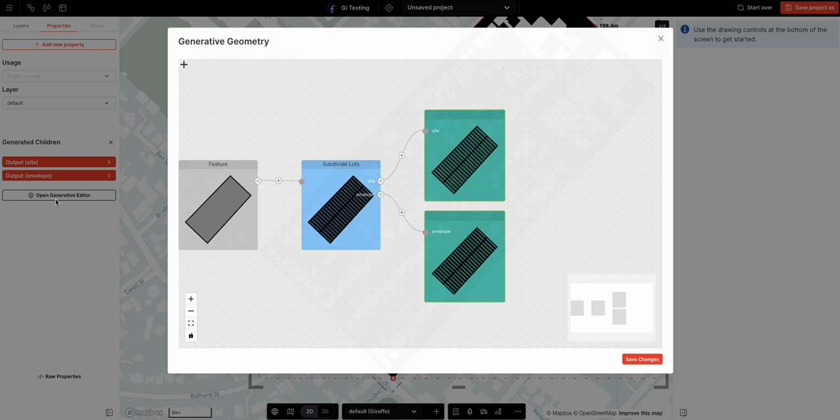Let's start transforming. The first thing I'm going to do is use the subdivide lot. I'm going to open the flow builder. And this shows you how the flow builder works.

You've got the input feature, which is the rectangle. Then this blue square represents an algorithm, which is a subdivide algorithm, and the two greens represent the outputs, which is a site output and an envelope output.

And so I can assign a usage to the output. So I'm going to go feature planting, and I'm going to say the envelope is a residential envelope with let's say three levels.

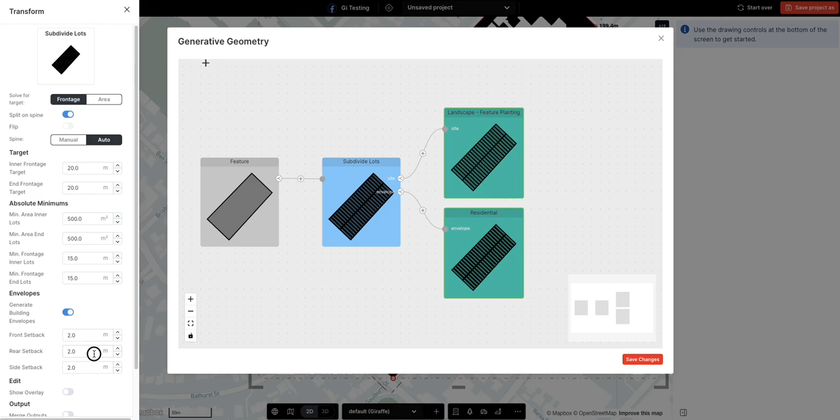And then I can click on the algorithm and edit the parameters. So we said the rear parcels were about 20 meters. So if I do that, then you can see, and this is what's amazing, as you edit these parameters on the left, you actually see the impact of those edits in each of these preview windows.

And so if I save changes, you can see there is a subdivision. I mean, that's not natural because I've drawn a very big rectangle. So what we want to do is we want to subdivide this subdivision.

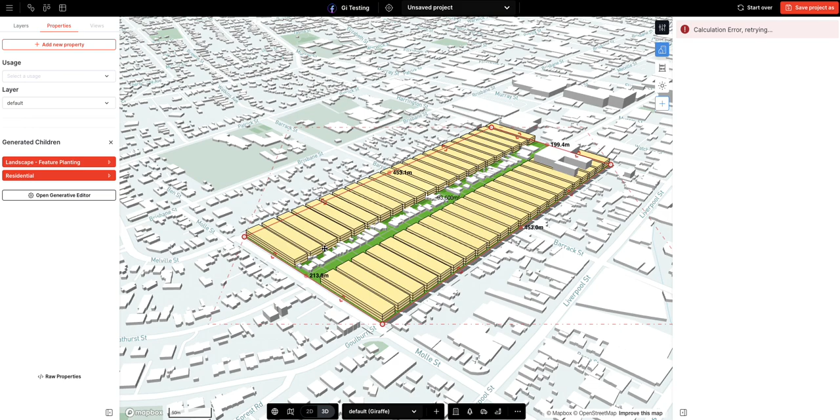So I'm going to delete this site because we don't need it. We're going to be operating with two subdivisions, so I'll put in another one. And when I click that plus button, we get the identity transform. So it takes stuff and just gives the stuff out, you know, f of x equals x.

And I'm going to apply subdivision again. Okay, so it's subdivide to subdivide. Now there's an issue here where the super lots are not 20 meters. They're closer to 180 meters.

So you can see now it's dividing into three. Maybe it's 200 meters. Let's leave it at this for now, and we'll come back and fiddle with it later.

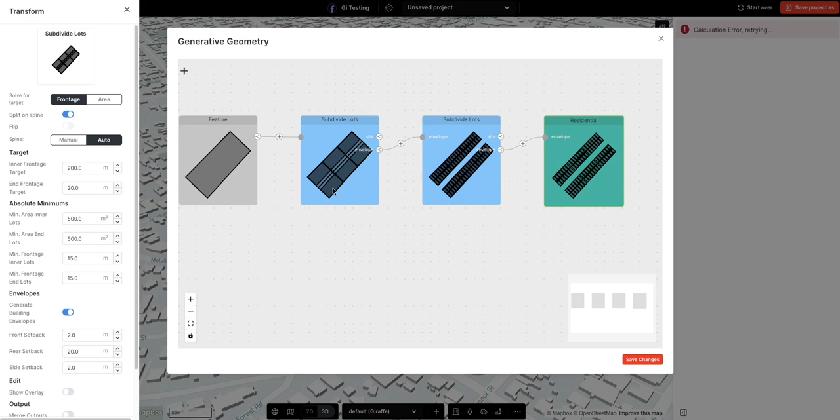I'll show you how. And what we're going to do is we're going to pretend the envelopes. We're going to set the envelopes, rather than being residential buildings like they are currently, we're going to set them as sites. And the setbacks are going to be the separation between those sites. And I'm going to set those setbacks, the side and the rear setbacks, to 10 meters.

You can see that there. And that 10 meters, because there's a 10 meter setback on each side of the boundary, sums up to a total of a 20 meter separation. And 20 meters is a good width for a road. You know, 4 cars, 2 pavements, 20 meters, it's a good amount.

So I've changed the parameters of this subdivide lots. And then I'm just going to change the parameters of this subdivide lot, which, because we just added it, is coming with the defaults. And I said the rear setback was about 20 meters, and let's set the front to 3.

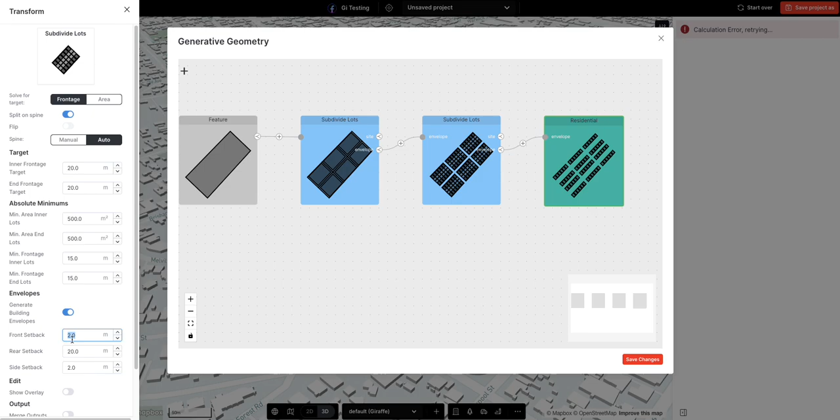Save those changes. Okay, cool. I think that's pretty cool. That's looking closer. Now I'll show you something here.

Is in this view, if you don't want to get into the generative editor or the flow builder, you can see the flow here. So if I click on this, you can backtrace, and if I click on this residential, you can see where this is coming from, in terms of the algorithms that the base rectangle is passing through to be converted into these things over here.

So the last one's this residential one. And this first one is the overall one. So I'm trying to get this a bit bigger. So maybe if we say target is 220, there we go.

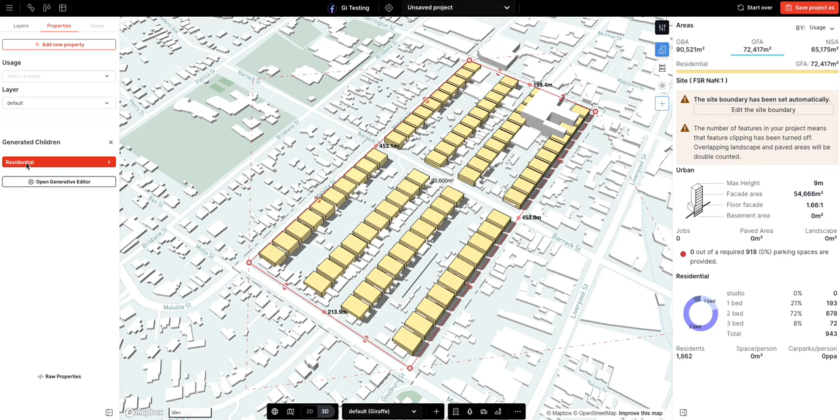Now we're actually getting dividing into 2 roads, which is what we wanted. But this, and if we click on this again and we look at here, the residential one, the inner frontage is about 20 meters. And if we pull this back, you can see these parcels are not 20 meters. These parcels are closer to sort of 10, right?

So let's set the target to 15 rather than 20. Actually, why not go to 12? It looks very narrow now, that's probably too narrow. So let's go to 14, and I'll stop faffing.

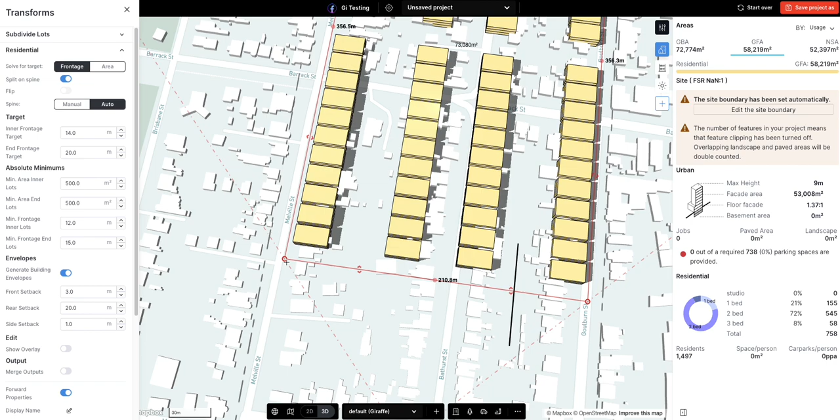The side setbacks appear to be a little smaller than 2 meters, more like almost 1 meter, could be a bit less. The front setback is hard to ascertain, because this block between Melville and Bathurst is actually bigger than Bathurst and Goulburn, which our hacked subdivision of a subdivision is not going to be able to accommodate.

Actually, you know what? I'm going to see if it's able to accommodate it. It is, it is, I take that back. John and Chen have built the most fully featured beast that it's possible to imagine. Incredible.

So that front setback, I think, is a bit more. Okay, there is something going on here which we won't be able to meet, which is that the setbacks on Bathurst look like they're a little smaller than Goulburn.

And you can see here there's a nice output for a town planner, seeing a constant rear setback have a different impact on the built envelope. Because these sites are longer and the rear setback is not a function of a percentage or a dynamic amount, it's a constant 20 meters, these are much smaller. So the solution would be to change them dynamically, or to equalize these roads a bit more.

Groovy, all right, 250, there we go. Okay, built form. Now I'm almost happy with this, but I want to get a bit more on the site stuff. So what I'm going to do is export these sites, and set their usage to something nice and green.

Deep planting, save changes. Excellent, we get that nice green. I'm just going to turn off the other buildings, and I'm going to do one more thing: offset the super lot with some nice rounded corners, so we get to visualize that road reserve a bit better.

So I'm going to come back to here, and get this envelope, which, remember, in the first subdivision algorithm, represents the super block. We then subdivide the envelope into blocks or parcels. And so there you go.

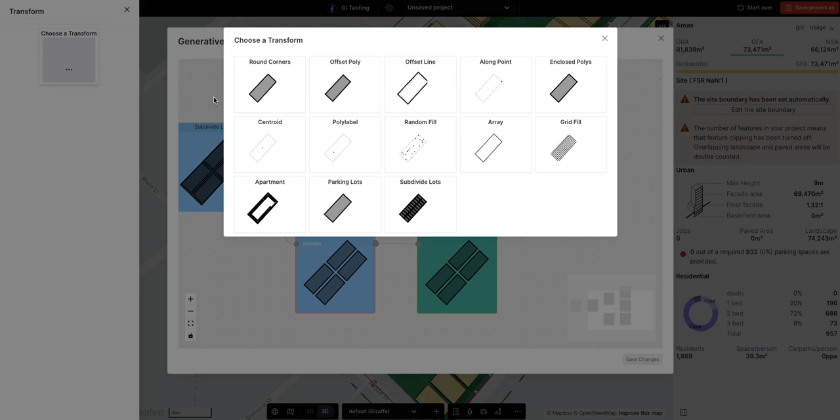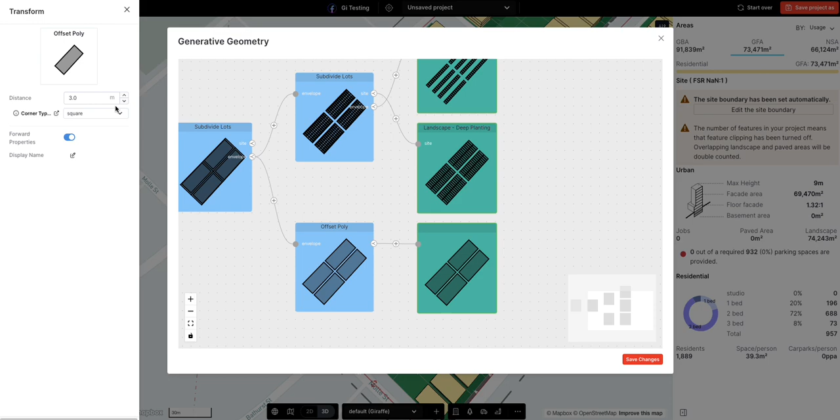I just click that, then I click plus, and I'm going to choose the transform that's going to be round corner. No, sorry, wrong one. I'm going to choose offset polygon, and offset it by 3 meters, with round corners.

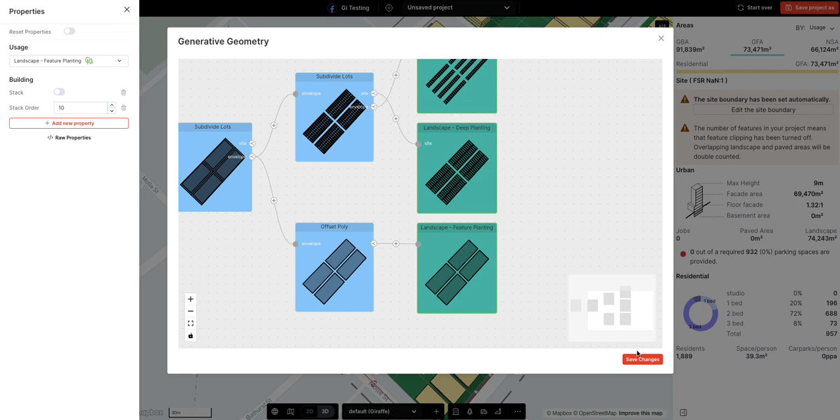And now I'll give it a usage in its green output box, and set the usage to feature planting, and save changes. Okay, excellent, now something's happening here. As you can see, the feature planting is higher than the deep planting. So if I open this and come to the planting, you can see the height there is 1.1, so I'll save those.

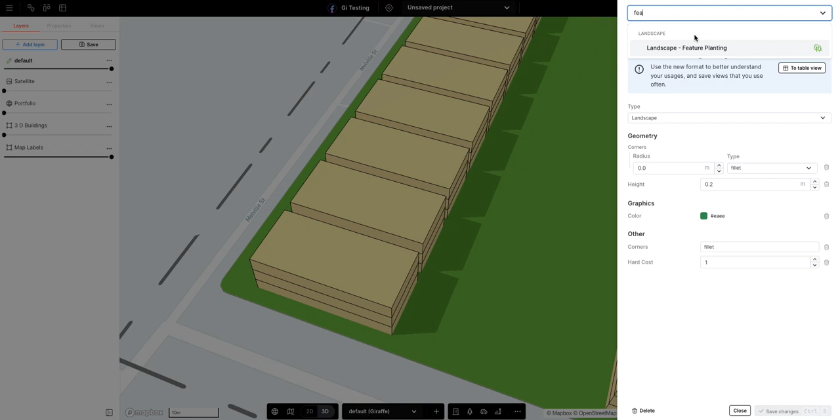Then I'm going to go to, hang on, deep. Now I want this to be 0.2. Save. And then in feature planting, I want you to be 0.1. Save. There we go, so now the deep is above the feature.

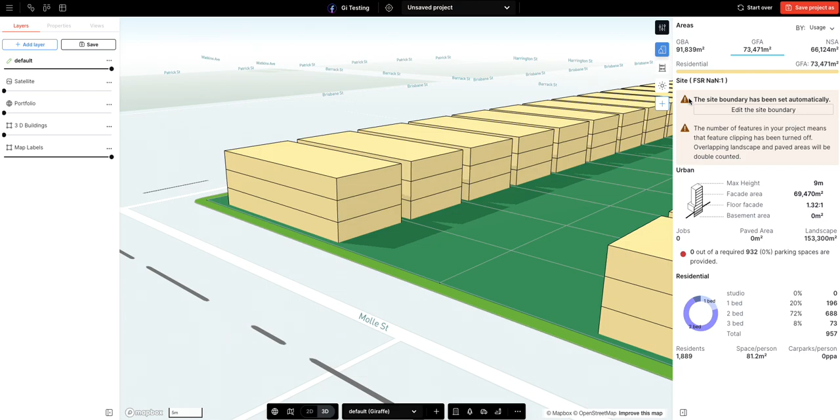So it's taller. So I've used the usage editor to change the usages which are being output, so you can see how all of the bits of Giraffe kind of fit together in a most delightful way. All right, bang, okay, I think that is pretty cool.

So a subdivision of a subdivision. We're using some manual overrides. You can see that Giraffe doesn't really care about rectangles. The algorithms are powerful enough to deal with kind of squiff rectangles, but not all urban shapes.

But let's say we're planning a new subdivision, you can see the algorithm kind of shears and stretches things, and there's a way you can get around that by adding a poly, like another point, which kind of straightens up everything except for the last bit.

And I think that's it. That's a really good representation of the built form here, within, what are we, 9 minutes. And hopefully you've got your head around how you can concatenate these functions, subdivision and subdivision and offsets, and use the usages as well to visualize. And of course you can count these things up and see the impacts of constant rear setbacks, etc. on the built form.